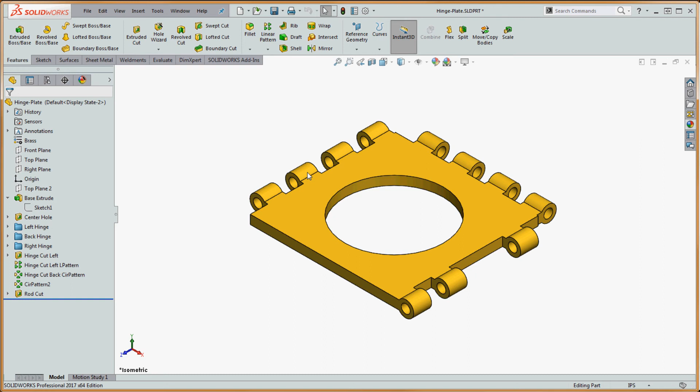1, 2, 3, 4. And essentially it's going to be creating what looks like 8 features over here on the left hand side, going between holes and then the hinge round back to a hole again and another hinge round after that. So what we're going to be doing is we're going to be making a cut here, and then with the linear sketch pattern we're going to take that rectangle that's going to define this cut here, and pattern it to 1/2 inch all the way down to the end of our hinge plate.

So let's do this. Let's go ahead and go to our top plane, and let's go ahead and go normal to that, and we're going to take a look at that. So if we click on the top plane, go over here to our view orientation, let's go ahead and scroll down to the normal button. And we're going to take a look at it here.

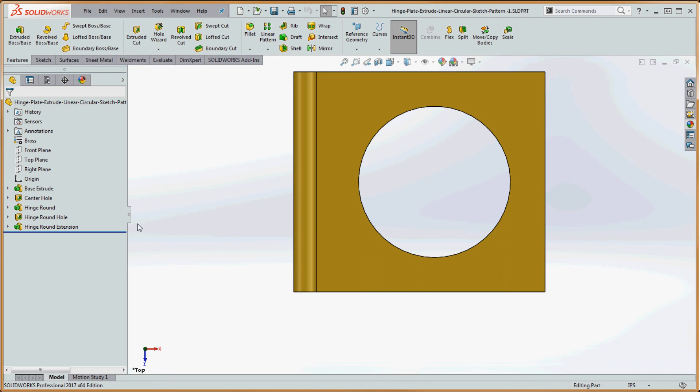And what we want to do is we want to go ahead and open up the existing sketch that we have in here, which is going to be that sketch 1. We're not going to necessarily open it up, but we definitely want to show it. So we're going to right click on that, and we're going to tell it to show, because we're going to borrow some of the sketch geometry in order to put this together.

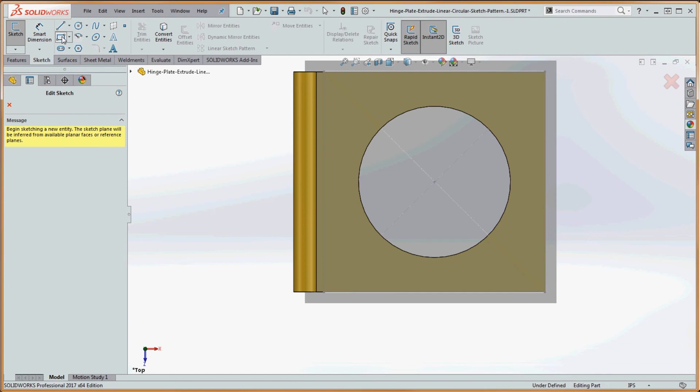So with that showing, we're going to go to sketch, we're going to go to corner rectangle, we're going to start over here in the corner. We're going to go ahead and start on this surface over here in order to put that together. And escape once if you accidentally put your cursor already down. But right click again and get you right back into that command. So just looking for geometry to sketch from. We're going to go ahead and start with that point over here.

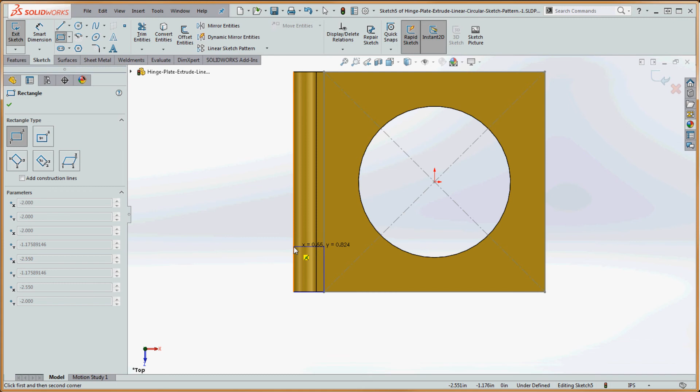Sketch it over here. If we can pick up that, you can see that orange selection of that edge. We're going to go ahead and try to pick that up. And you can see the preview of what we're going to be getting in regard to the sketch relationship, which is going to be a coincident relationship, and we're going to go ahead and use that. So now that we have that in place, we have a coincident relationship over here, coincident relationship in the lower right hand side, 2 verticals and 2 horizontals, and it's almost fully defined.

What's not defined over here is the length of that. So we're going to go ahead and put a smart dimension on that of a 1/2 inch, so 0.5. And now we're going to go ahead and cut that. So we're going to go to Features, go to Extruded Cut. I'm going to go to Through All.

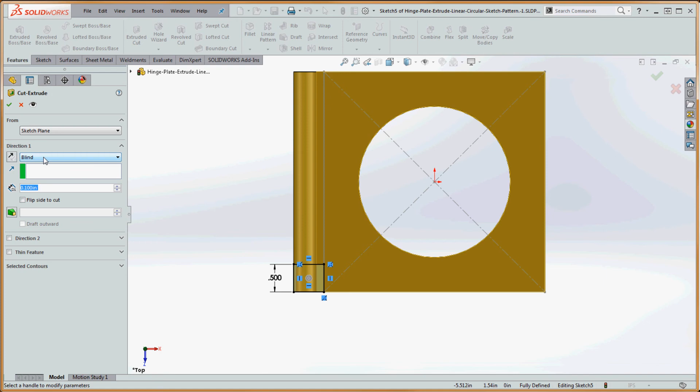And if we go to the green check mark, you'll notice we still have a little piece in here. So what we had in here is we started from that plane. We did Through All, which went through all down to the bottom. What we really want to do is we want to take that feature and we want to do Through All in both directions. And what that does is it's going to open up our direction number 2 down here. Let's go to Through All both, and it's going to go ahead and check mark that, and it's going to go Through All on the other side too.

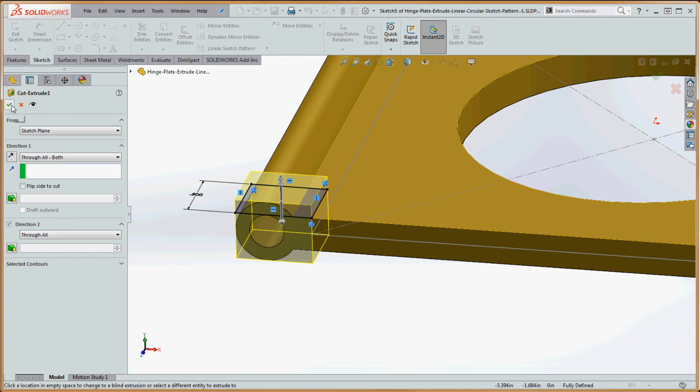So a little bit of time saver. You make one selection here instead of having to come down here and check that box and go to Through All over here too. So you save yourself a few steps. Go to the green check mark, and now we have that in place. So let's go ahead and go to the isometric view and take a look at that from the very top, and we'll go on to the next step.

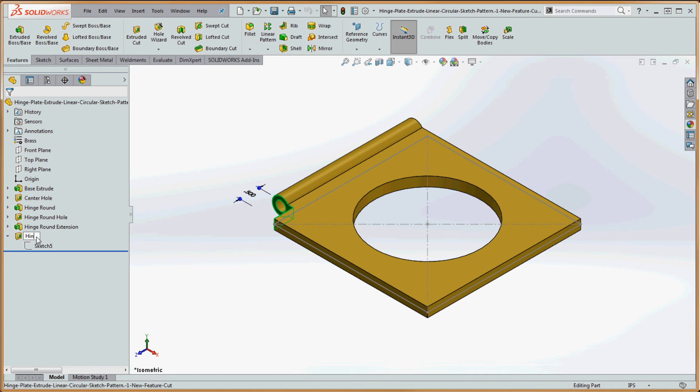Alrighty, so let's tidy this up a little bit. Let's take our cut extrude and rename that to something that's a little bit more descriptive. We're going to call it our hinge cut. And now let's go into our sketch 5. Let's right click on that and go to Edit Sketch. And let's go normal to. So if we go up here to our view orientation and go to the Normal To button, now we can see that. So a very simple sketch.

What we're going to do is we're going to pattern that going down the ridge of our hinge round that we have. So right now it's a 1/2 inch, and this is all going to be 4 inches. So if you think about it, we have a 4-unit cycle that goes down this. So we're going to alternate between a cut, and then a round, and then a cut, and then a round, and then a cut again. And then we're going to continue that all the way to the end. So if you think about this, the cycle repeats itself after about 1 inch.

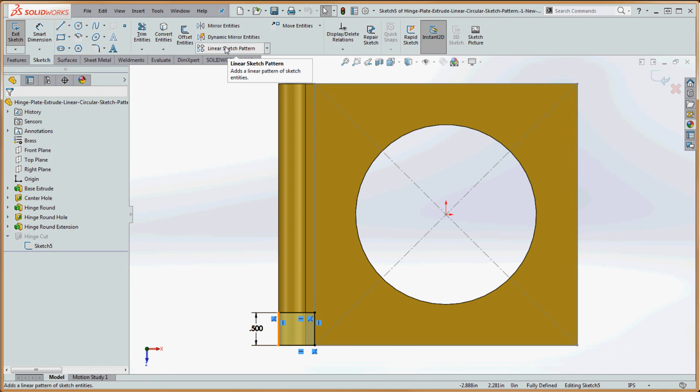So one way to do that is we could do that as a feature, but I'm going to show you how to do that as a sketch first. We can go up here to our Sketch tab. On our Command Manager, go over here to Linear Sketch Pattern. We're going to go ahead and click on that, and it automatically opens up a dialog box over here on the left-hand side in our Property Manager.

And right now it's suggesting how we want to put that together. So right now it's giving us an X and Y axis. Right away, right out of the box it's showing us what we can do. We could also pick items over here in the modeling area in order to define that. But I like the idea that it gives us these axes to start with.

But if you think about the x-axis and you think about what we have down here, we're essentially sketching on the x and the z-axis here. So the y-axis probably is not going to help us very much. The z-axis might. But if this were actually the z-axis, we might want to consider that. Go up here and make that instance 1. Right now we just have one instance of this. And maybe make this one 2 down here.

So let's do this. Instead of choosing the axes that are selected for us, let's go ahead and choose our own. So this is already open. We have a light blue dialog box which is open, our selection box. We're going to go ahead and click on that edge up here. We can very easily select this edge over here too. What we want to do is select an edge where it can pattern along. So right now the distance between, as we work our way from the top to the bottom, is 1/10 of an inch, which isn't much.

And just for the fun of it, so we can get a preview of this as we go along, let's just jump down here to Entities to Pattern and click on all these entities down here. So you can get an idea what some of the selections are going to do when we make our choices down here. So 1/10 of an inch, you can actually see it's going in the wrong direction down here.

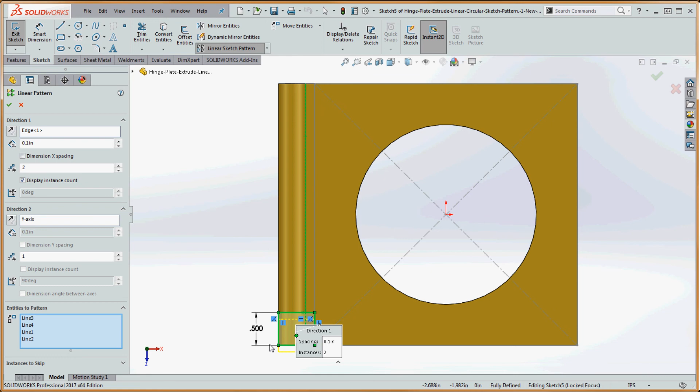So we're going to scoot out a little bit, and we're going to go ahead and change the direction. So we're going to go off in this direction actually. And you can barely see it, but there is an arrow in here, a gray arrow. If you click on that, that also gives it the capacity to change the direction. So we want to go up in this direction.

And the spacing is going to be, we want to repeat the cycle every inch. So we're going to go ahead and type in 1 over here. And just take our cursor, maybe just rest it over here temporarily in the instances box. So right now it's got 2 instances of the pattern we want to pattern out. So we're going to actually type in 4 in here, so we want to have 4 to go all the way around.

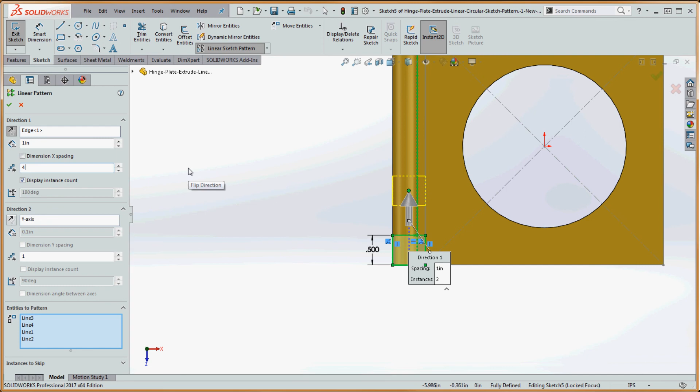So let's go ahead and click inside of the modeling area. Now you can see the preview of what we're going to get. So from the top we chose that edge, 1 inch for the spacing. We have 4 instances down here, and between this is a checkbox for dimension X spacing, or a dimension spacing between us, not necessarily along the x-axis.

But let's go ahead and put a dimension between that. I think it's going to put a dimension between this line here and where that line begins the next portion of that cycle. And it's going to be 1 inch. So we're going to go ahead and put that dimension in here.

If we go down here to direction 2, quite literally we can pattern this out kind of like a checkerboard if we wanted to do that and define a different direction, but we're only going to be going off in a linear direction here rather than a matrix. So we're not going to put anything in here, but we could also put in similar values down here.

Right now the instance down here is just 1, so if it's going to go off in the X direction or a different direction, we still only have 1 of that, so it's okay. There's nothing up here where you can uncheck it to get that gray in the background. If you just have 1 instance in here, it's not going to change anything. We also have the option to change the angle in here too, if we didn't define it in other ways. But we'll cover that at a different time.

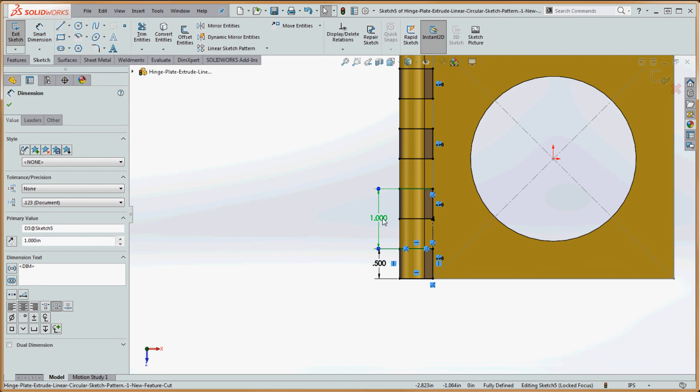So entities to pattern, that's already selected, so it looks like we're ready to go. So if we go to the green check mark, now we can see what we do. Because we had checked that dimension for the linear pattern to put a dimension on that cycle, it put in that 1 inch dimension, so it actually comes to us fully defined and ready to go. Now if we go to rebuild, you can see our pattern, and you also will see an instance number down here too.

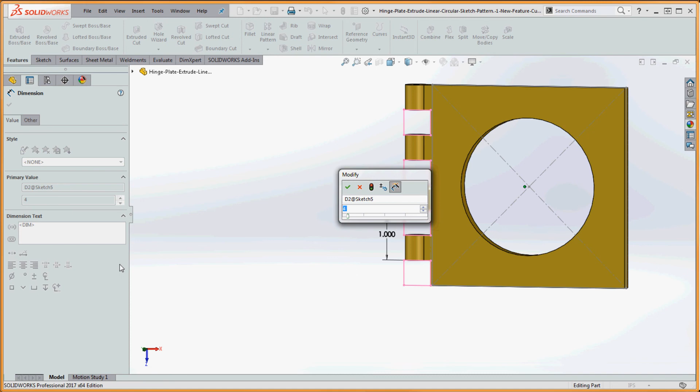So with that instance number, we could actually change it. We could double click on that number instead of having to go into the sketch itself and change that. So let's change that to 3 just for the fun of it and see what that does. And if we rebuild that, now we're only going to get 3. 1, 2, and 3 in here, and the one that cuts this one in half is gone. So we can change that back to 4, change it to 5 if we want to do that.

We can change this too. We can change that dimension without having to go into the sketch. Kind of convenient to do that. It remains visible for a while. If we want to make that 3/4 of an inch, now you can see what our cuts look like there. So let's go ahead and bring that up to the values that we're looking for. And that's the way you do it.

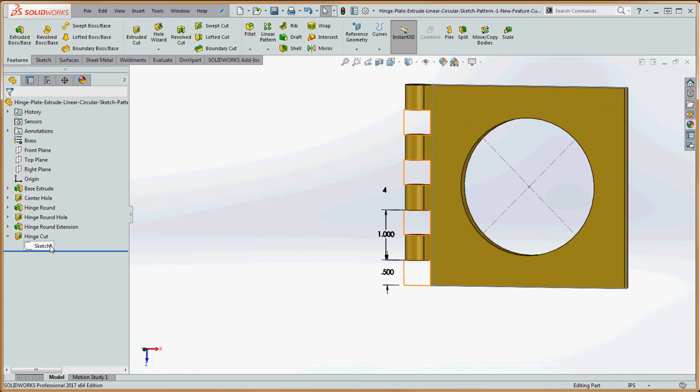So the linear sketch pattern allows you to take an existing sketch geometry and pattern that within the same sketch. If you go in here to a hinge cut, you see nothing different about sketch 5. It looks the same. The wording associated with sketch 5 hasn't changed. And if you were to right click and go inside of that, you can see what it did. You still have that pattern in here. But outside of that, if we rebuild that, we still have these 2 sketch elements in here that we can change to make modifications to that.

If we go back to our hinge cut, sketch 5, and take a look at that, what we've done, we have a new sketch relation. And if you rest your cursor over that, it tells you what it is. It's a pattern line relationship. And it tells you what number it is too.

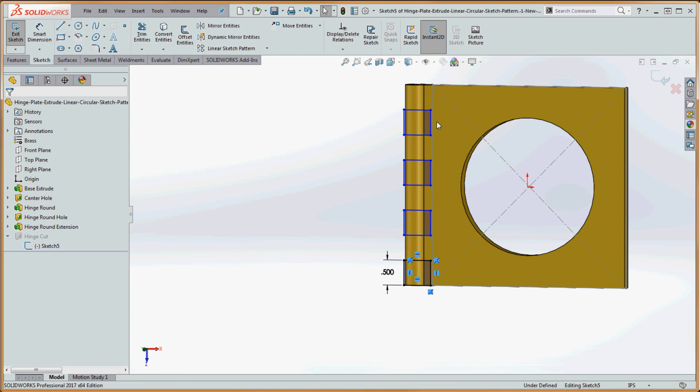So it's taking line number 2, which is this line down here, and it's patterning that up there, and it's renaming it to number 10, or renaming it to number 14, and so on and so forth. And if we were to take that sketch relation and delete it, it deletes all of them, and now you have this full flexibility in here of all these items. So don't want to do that.

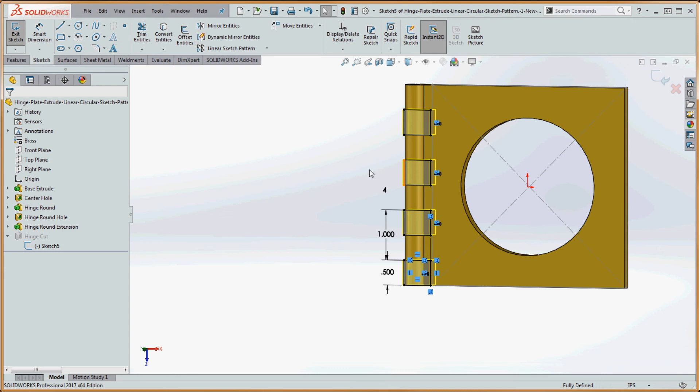The nice thing about this feature, and I'm doing Control-Z on the keyboard, is that with just 2 dimensions in here, this dimension over here and the instance number over here, and with that linear pattern sketch relation, it fully defines that sketch. Pretty quick and easy. And if we were to rebuild that, now we're all set to go.

Okay, so we're going to do something similar, something that's a little bit different. It's going to be the circular sketch pattern, and as it implies, we're going to circulate some sketch elements around a center of something. Right now we're going to go ahead and click on this point over here, which is the center of the base feature of our hinge plate.

Now conceivably we could take these cuts that we have in here and rotate these cuts around our model too, both in the back and then the right side of our hinge plate. But because we don't have that hinge round back here, we'd be circulating cuts where we don't need to cut. So we're going to put in a whole new feature. So we're going to go ahead and put in a circle in here.

Now let's make sure we have this normal to, and I think you know how to do that by now, but I have it as a shortcut key on my keyboard. And of course, when you're normal to something here, it allows you to pick up that sketch geometry that's in the background. So you might find that to be a lot more convenient when you start doing a lot of sketch modeling. So we're going to go up here to the Sketch tab.

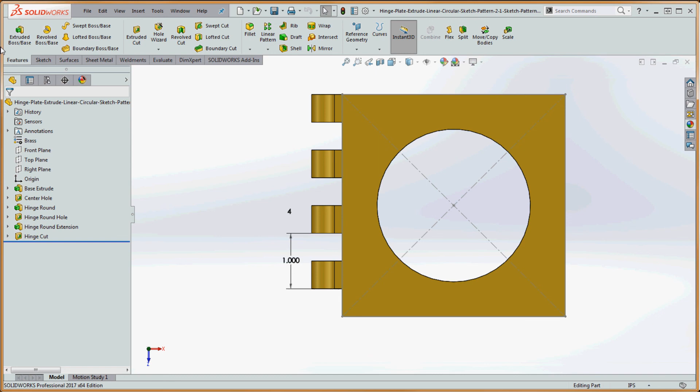We're going to go to Circle, choose that surface in here and then sketch out a circle. We probably should have selected that surface first, but let's rotate that around to make sure it's in the right place. Let's take that circle and drop it on that line in here. Let's put a dimension on that and define this a little bit better. And let's select just one element. I was trying to select more than one.

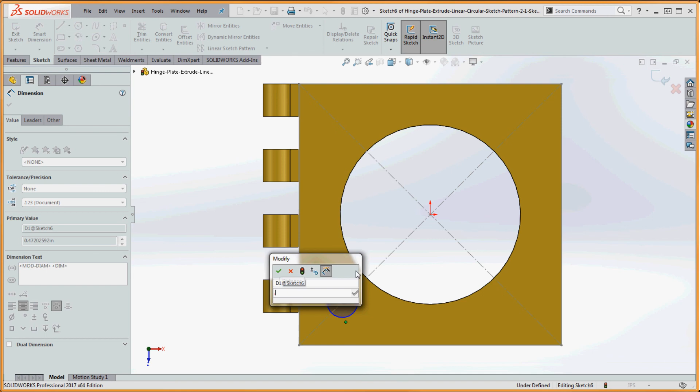But 0.4 is going to be that value for the diameter, and let's select between the circle and that edge over here. We're going to make that maybe 0.7. So now we're going to put in one additional dimension, a dimension between the circle and this point in here. It'll become apparent later what that's going to do. But we want to have some sort of reference in here to understand how the circular sketch pattern actually works.

So we're going to click on that. And it's given us a couple different options. We can go horizontal or vertical. What we want to do is go to the 45-degree diagonal in here. So once you get that orientation in there, right click on the mouse, you see that blue button? Let's drop that into place with the left mouse button.

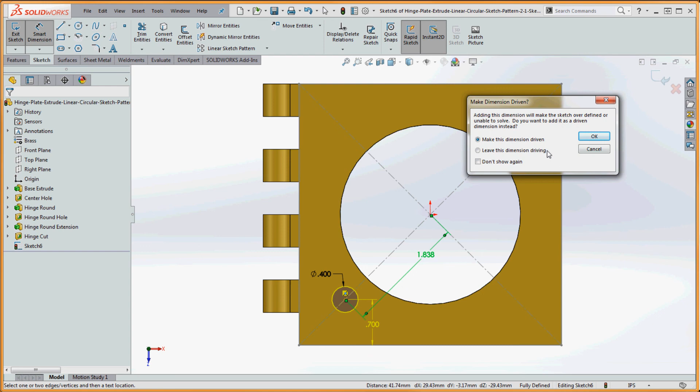And then you get this warning up here. What we want to do is make that dimension driven. It's already fully defined in here. If we put more dimensions in there, it's not going to like us. So we're going to go to OK. So now we have those dimensions in place. If we do escape once, now you can see this is gray in the background. We're going to use that for reference in a bit. And this circle is already defined by the existing geometry that we have.

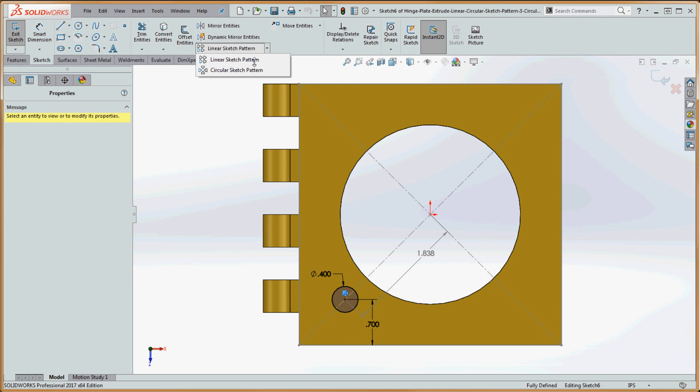Alrighty, before we actually do a feature here, let's go ahead and do our pattern first. What we're going to do is we're going to pattern the circle around this point over here. So let's just get started. Let's go up here to our Sketch tab, go over here to Linear Sketch Pattern, and actually choose the item that's just below that. If you go to the down arrow and choose Circular Sketch Pattern.

So typically we start with the Properties Manager from the top and work our way down to the bottom, but it's a little bit more fun and productive if you go down here to Entities to Pattern and select that first. So let's go ahead and select inside of that. It turns pink, but that's an old selection color. But we're going to go ahead and click on that, and what it does is it helps fill in the blanks from the top going down. So let's see what it's choosing to do for us here.

So right now it's choosing a parameter, which is going to be that point in the center of our base feature for our hinge plate. It's going to go ahead and choose that. The X and Y offset is not really the X and Y as you see in a triad here. It may be, but typically it's the X direction going off here as you could think about the Cartesian coordinate system, and then the Y direction going up over here. So how it appears on the screen is how it's orienting itself here.

So for the offsets right now it's 0, but if we were to put in something like maybe 0.5 inches in the X and maybe 0.2 inches on the Y, you can see that it's going to do that offset, but we're going to keep that at 0. And those are linked to some selections that are available a little bit lower from here. So for 360 degrees, it's considering we want equal spacing going around here. So it's got that box checked.

For instances, we can make that maybe 6. If you want to do that, you can see how that fills in. And we can also change that value here. Instead of 360, we can make that 270. So now it's going to take those 6 circles and pattern them around, but stop at 270. So it's going to go between 0, 90, 180, and 270 here and fill in 6 equally spaced holes.

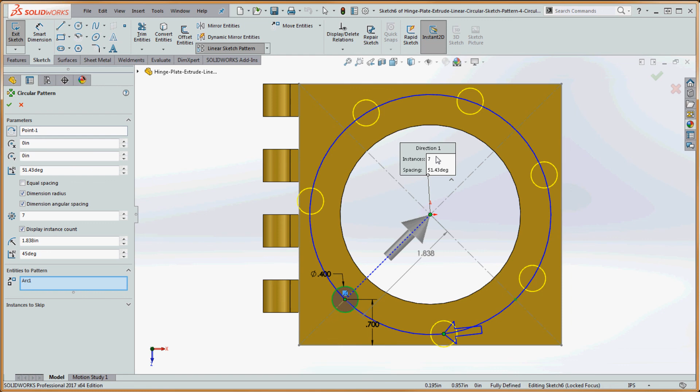We also have a dialog box up here in which we can change some of the parameters that we see over here in the property manager. So instead of instances, if we want to do 7 perhaps, we can put that in here. So now the angles are going to be 51.43. Maybe 5 would be good. So let's go back in there and put in 5 and see what that does. So it's still 51.43. But spacing, we can change that to maybe 30 degrees between the spacing, and now you can see what that does.

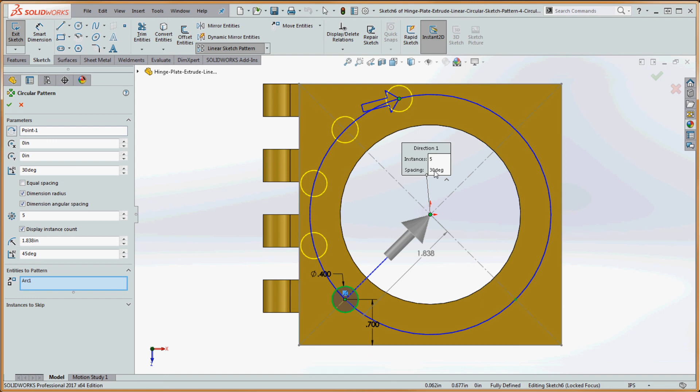So you don't have all the options that you have over here, but you do have some, and you can make changes to those. So instead of 30 degrees, let's make that 50 degrees and see what that does. So 5 instances at 50 degrees, and it's going to put a 50 degree angle between our first and second instance when we put that in place. So, instances to skip over here in our property manager.

If we were to open that up, you can click inside of that, or take that pull-down arrow and open that up here and click inside of that, so it gives us the capacity to go over here and make a selection. We're going to select some instances to skip. So you'll notice that inside of these preview circles you have a red dot. If you were to click on that red dot, it turns orange and the preview disappears. Same thing over here. If you were to click on that, that's our instance number 5. Sometimes if it doesn't disappear right away, you have to open up your selection box over here in your property manager to get that.

But if you want it to come back, right now it's a green arrow because it's showing the very end of that line. We could just click the orange dot, and it comes back. So let's take this one and get rid of it. It's orange, it's not really there, but if you were to click inside of the instances to skip, it's there. So now instance number 4 is being skipped. So if you think about this being 1, that's 2, that's 3, that's 4, and then 5 total.

So one thing to note here too is that instances to skip is a dialog box in the linear sketch pattern. I didn't show it to you because it was kind of off the screen a little bit, but here it's a good way to demonstrate it, and it's got the same thing too. We got the red dots, alternating red dots and orange dots, and then a preview that appears and disappears too.

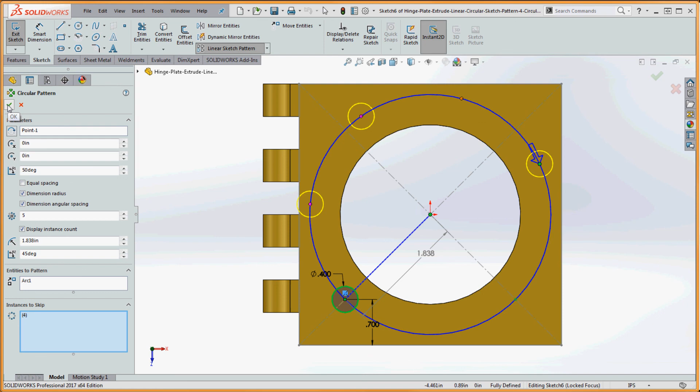So now that we have this all set, and make sure we have it all set, go to the green check mark, because once you go to the green check mark, you ain't coming back. So if I click on that, now we have that in place. And you'll notice that we have these blue circles in here. The first instance is fully defined, but these other ones aren't.

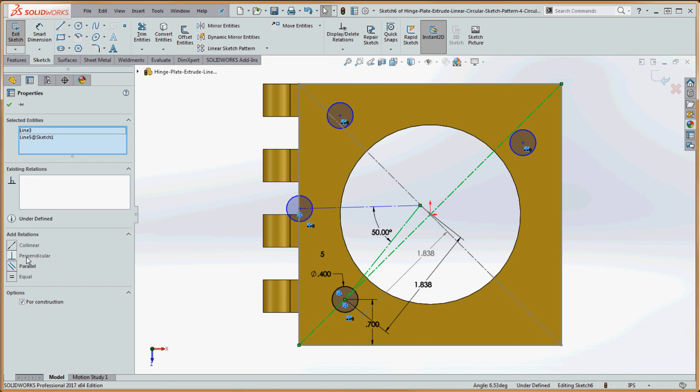So typical of trying to find out what sort of freedoms you have with your sketches that aren't fully defined is take that circle point in the middle of that circle, or any point, and just move that around. So if you move that around, you can see what we need to do. And if you remember us talking about this line in here, we can make a relationship between that line and the existing sketch line in the background. And with the control key depressed, we can make that collinear. Once it's collinear, it's fully defined. And now we have that sketch relation that we're familiar with, the pattern sketch relation.

And let's talk about that being arc number 3, and then this pattern down here is going to be arc number 2, or instance number 2, and so on and so forth. If you're to get rid of those, it's going to get rid of all 4 of them, and then they're going to be free floating circles. And here's that degree dimension that we see between these 2 lines. That was put in there as part of that circular sketch pattern.

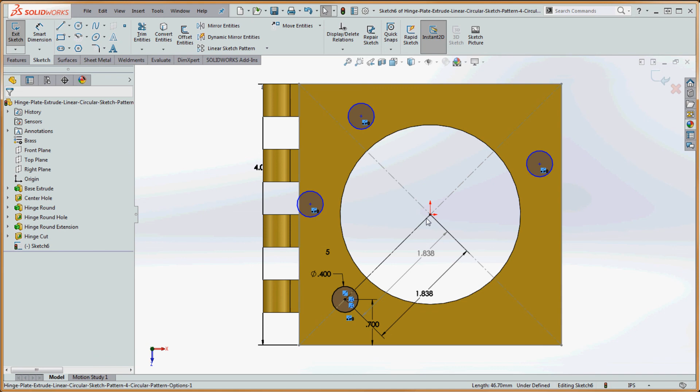And if we deleted this or didn't put in that second instance in here, then we'd have to try to define that. So if that line wasn't in there, then we'd have to actually establish that line and make that relationship ourselves. So the first one was 50, but we could do this. We can put in a smart dimension between this line and that line and do exactly what the circular sketch pattern did for us, and put in 100 degrees, and it gets it fully defined.

So let's say we want to bring back this instance over here, instance number 4. Well, where is it? What do we do? I mean, that's the biggest drawback of the circular and linear sketch pattern, is that you can't go back and make modifications. It's just a facilitator and just puts extra sketch elements into your sketch.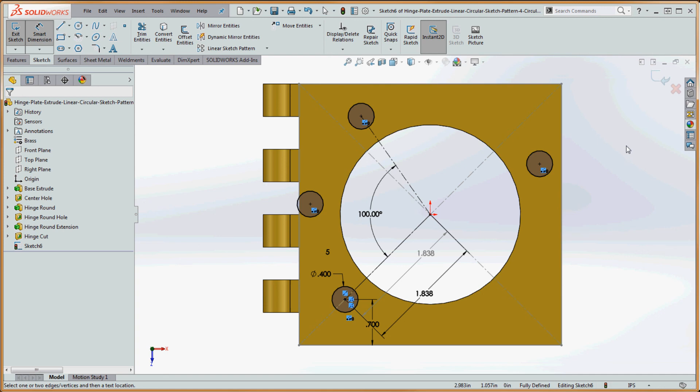But if you want to bring back that instance, then you're going to have to sketch that circle out, make it equal to this circle, make it equal distance from the center over here to this line, and then put an angular dimension of 50 degrees between those 2 lines. That gets that back. So if you think about that, a feature pattern is actually a lot more convenient than a sketch pattern, but there are advantages to either one.

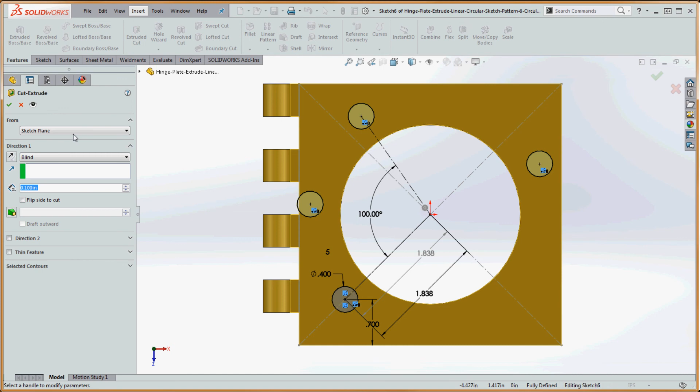Alright, so now that we have our sketch elements in here and they're fully defined, now we can do something with it. Let's go ahead and do an extrude cut, actually. So let's go up here to Features, Extruded Cut, Through All, green check mark, and now we have that in place. So it kind of looks like Swiss cheese in a way, but there's our new hinge plate. And it's not going to be part of the final hinge plate, but it's a demonstration of how you could use linear and circular sketch patterns to help facilitate getting those extra sketch entities in here in order to do your features.